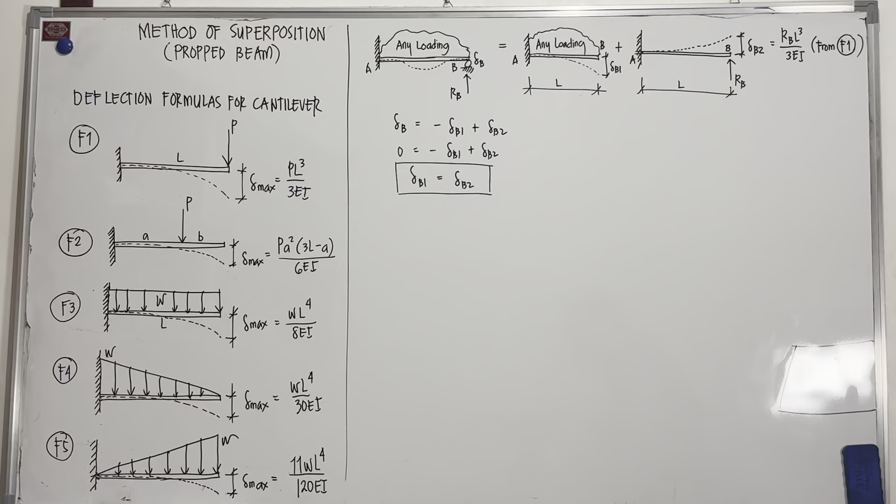So our topic for today is about the method of superposition in propped beam. So here are the deflection formulas for cantilever. Meron po tayong formula 1, 2, 3, 4, and 5, depende po sa load na nakalagay dun sa cantilever. So yung mga formula na yan ay magagamit natin pagka magko-compute tayo ng mga reactions sa ating propped beam. Kaya mahalaga po itong mga formula na nandito.

So here is the concept of the method of superposition. For example, we have here a propped beam with any loading, kahit anong load po yung meron dyan. Then this is point A and this is point B. Tapos ang gagawin natin, tatanggalin muna natin yung roller support. So pag tinanggal natin yung roller support dyan, magiging cantilever po siya.

So after nyan, pwede naman po nating ibalik yung roller support pero matatanggal na po yung mga loads niya. Ito po yung sinasabi dun sa superposition, that a propped beam can be computed by equal doon sa cantilever beam na any loading na wala siyang roller doon. Tapos ipa-plus lang po natin doon sa cantilever beam rin po pero roller support naman po yung kanyang support doon sa right end. Okay? So pagka in-add nyo yan, equal lang rin yan dito sa propped beam. Okay? So itong dalawang to na cantilever equal po siya doon sa tinatawag nating propped beam.

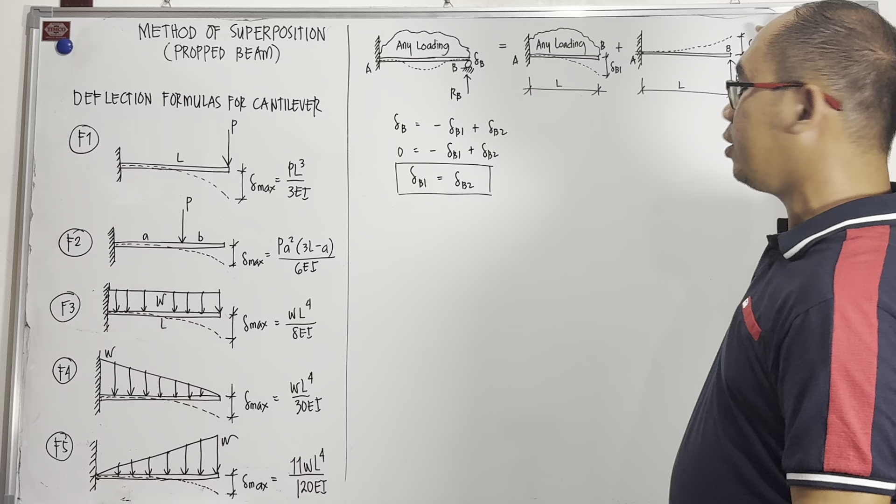So if we draw the elastic curve, let's say ito po yung magiging elastic curve niyan. Tapos yung elastic curve naman po ng cantilever beam ay ito. So downward siya kasi may load siya dito. Then kung yung reaction naman po sa point B ay magre-react pataas, so upward naman po yung deflection niya. So magkaroon po tayo ng sign convention na kapag downward po siya, negative, tapos pagka upward siya ay positive. Ibig sabihin, dito meron tayong deflection dito which is 0 ang value. Bakit 0 ang value? Kasi may support.

So deflection sa B is equal to negative deflection sa B1. Let's say this is B1, deflection sa B1. So negative yung value dito kasi downward. Tapos yung dito naman po, deflection sa B2 is upward, kaya positive po siya. Okay? So from this, we can say that deflection sa B is 0 kasi meron siyang support.

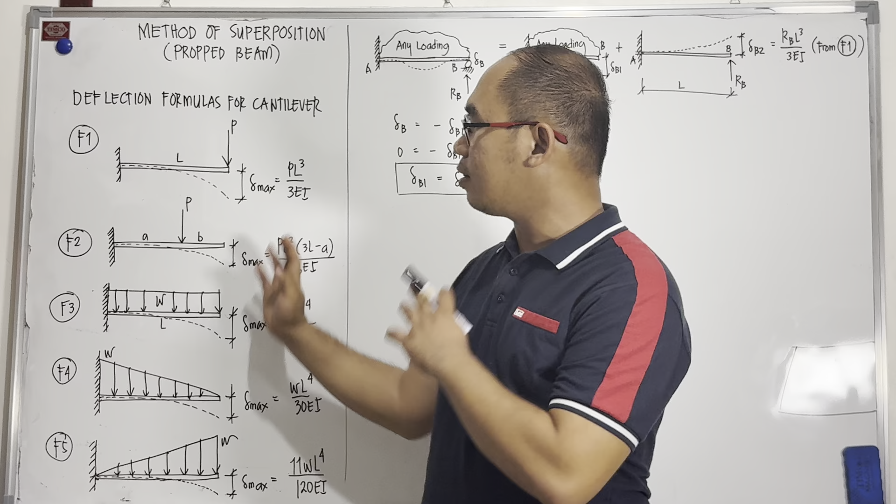Tapos negative deflection sa B1 plus deflection sa B2 is equal to 0. Okay, so take note that the deflection at B2 is always RBL cube over 3EI. Saan galing yung RBL cube over 3EI? From formula 1. So sabi natin dito ang maximum deflection, lahat po yan maximum deflection yung makokompute yan kasi sa free end. Lahat ng deflection sa free end ng cantilever beam is maximum deflection. So ang formula po natin is PL cube over 3EI. Ang P po natin dito is RB o yung reaction sa B. So palitan lang po natin yung P ng RB. So yun na po yung magiging value ng deflection sa B2.

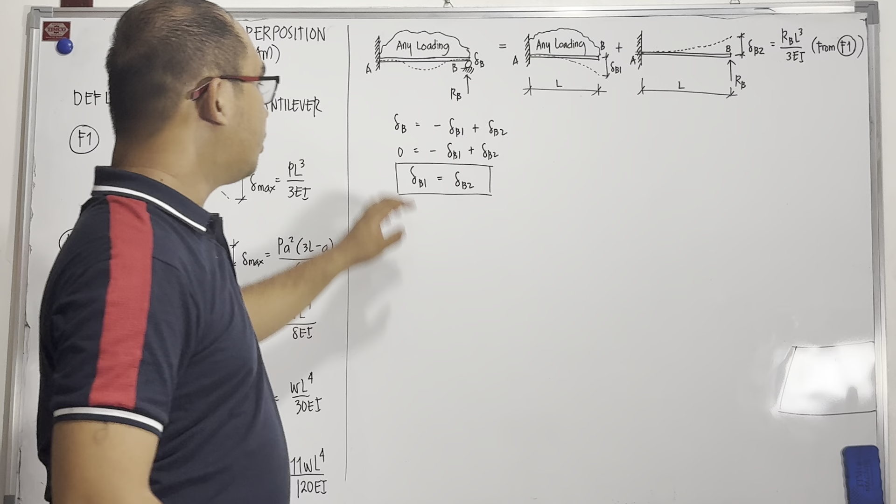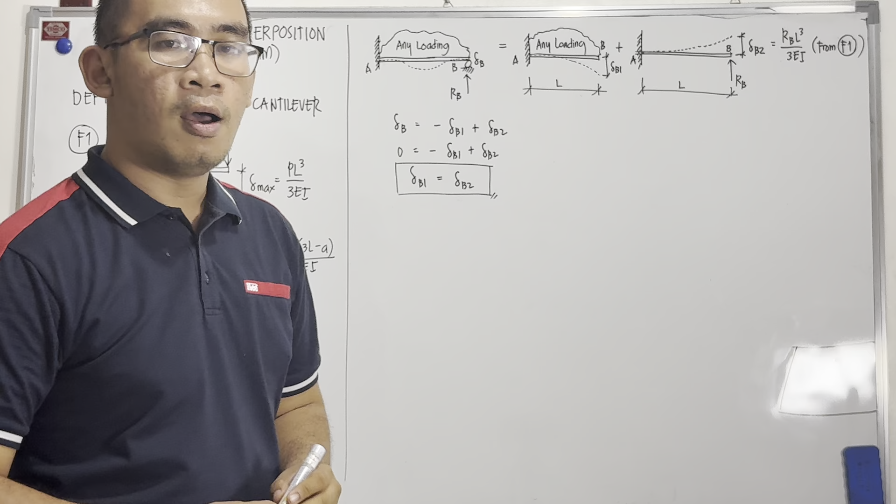Okay, so if we simplify this equation, we can say that deflection sa B1 is equal to deflection sa B2. So ito po yung gagamitin nating equation para makakompute mamaya ng mga reactions sa propped beam.

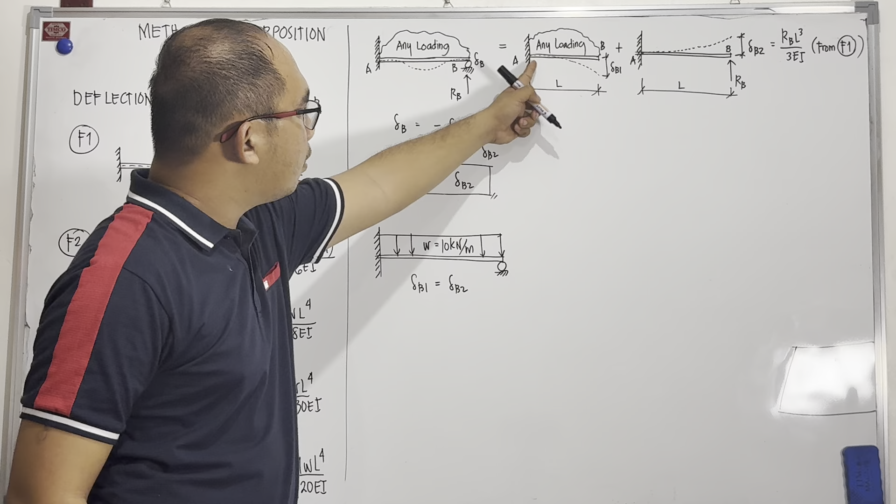So let's try an example. For example, we have here a uniformly distributed load, which is W is equal to 10 kN per meter. Tapos meron naman po tayong roller support. Okay? So paano po natin mako-compute yung reactions using the method of superposition? So deflection sa B1 is equal to deflection sa B2. Ano po yung deflection sa B1? Yun po ay ina-assume nating cantilever na meron siyang load.

So pagka meron siyang cantilever beam na meron pong load, alin po dito sa formula na yon ang gagamitin natin? Formula number 3, ito po yun, no? So kung tanggalin nyo po ito, ano magiging itsura? Magiging cantilever na may uniform load. So ang deflection po dito ay yung ating WL to the 4th over 8EI.

Equals, what is the deflection sa B2? That is RBL cube over 3EI. So if we simplify that, matatanggal po yung raised to 4, matatanggal naman yung raised to 3, so that the reaction sa B is equal to, magka-cancel po yung EI.

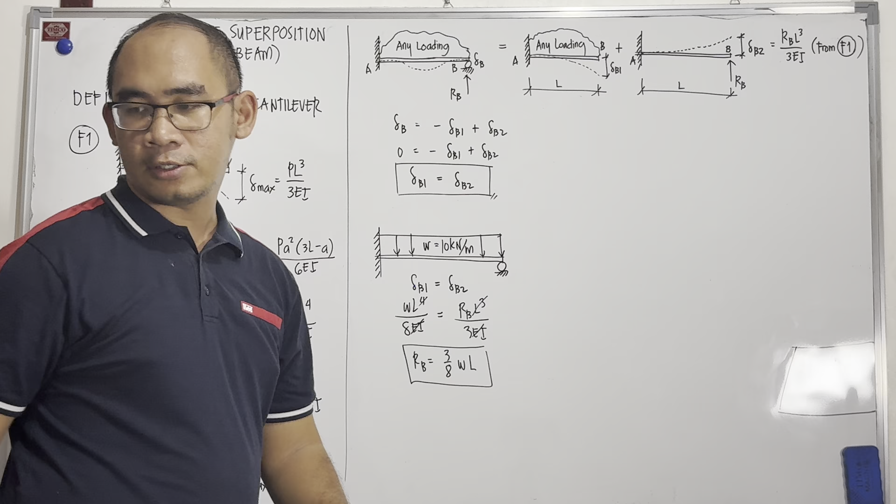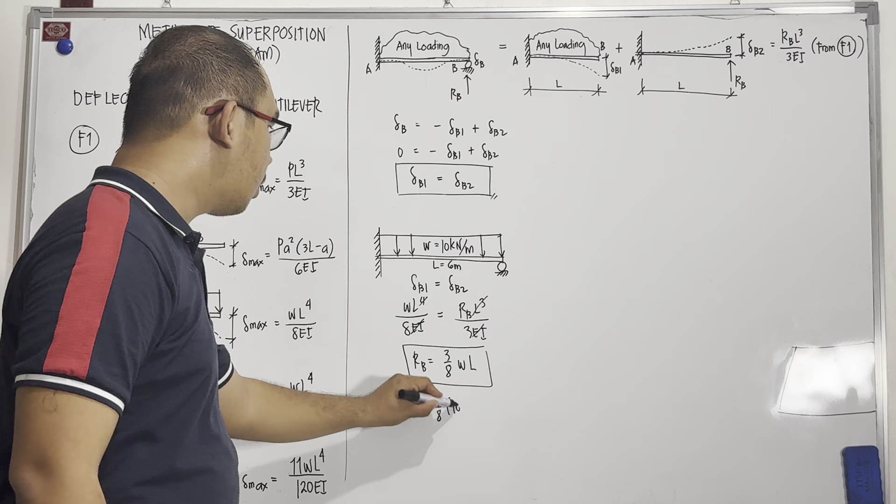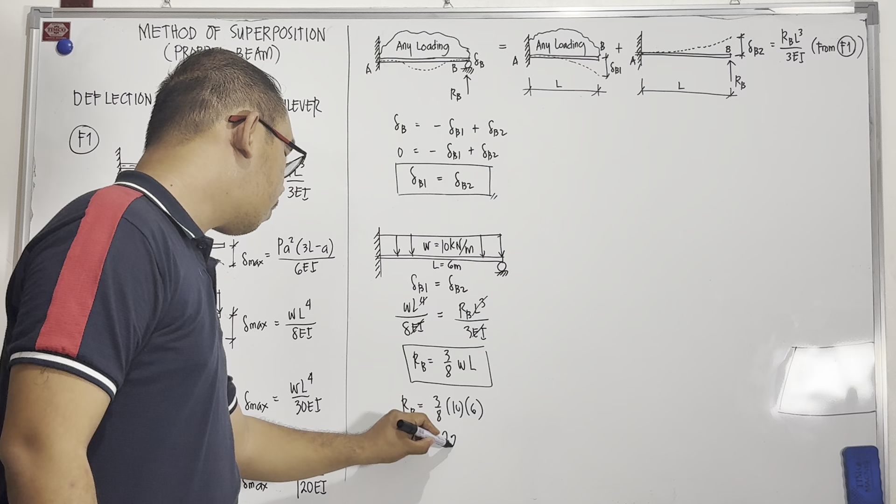So that is 3 over 8 ng WL. So here is the formula for the reaction sa B kapag uniformly distributed load. Kung gusto niyo, gamitin natin yung value na meron tong length na 6 meters, tapos may uniform load siya na 10 kN per meter. So let's say yan yung value. So you can simply compute for the reaction sa B by 3 over 8 ng 10 times 6. So the reaction at B for this problem, that is 22.5 kilonewton. So ito po yung formula.

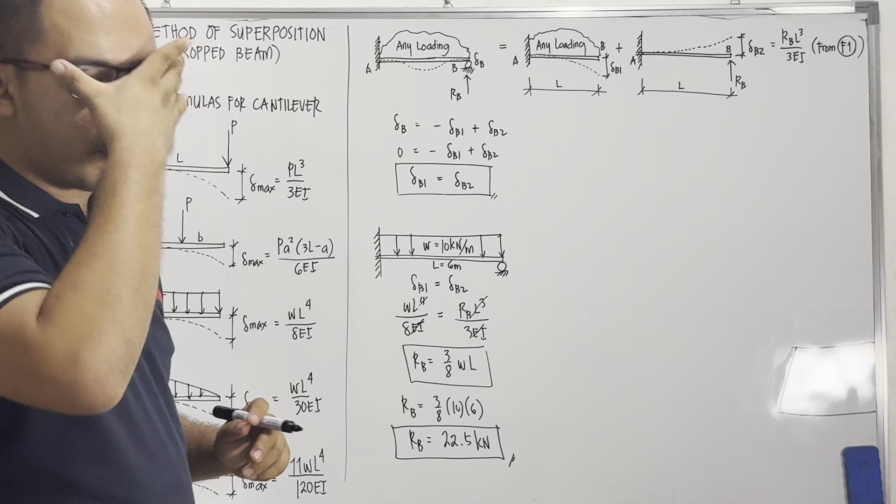Pwede nyo na pong kabisaduhin kung sakaling maka-encounter kayo ng ganitong problem, na dapat distributed load siya hanggang doon sa lahat ng span.

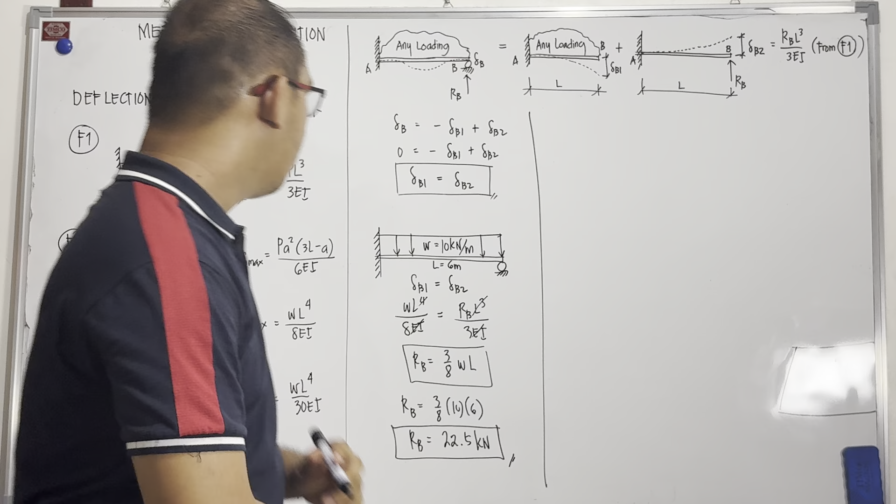Okay, let's say meron naman po tayong triangular load. At ang triangular load natin ay ganito. So let's say meron tayong triangular load na 30 kN per meter, tapos ito ay 6 meter. So ito po yung W niya, tapos ito naman po yung L. Okay, tapos may point A, tapos may point B rin po tayo. So kung tinitignan natin ang reactions, balik lang po tayo sa formula natin.

So deflection sa B1 equals sa deflection sa B2. Ano ngayon ang deflection sa B1? Anong formula po dito ang magagamit natin? That is formula number 3, so that is WL to the 4th over 8EI, is equal to, ano po yung deflection sa B2? Ayun po, so RB L cubed over 3EI.

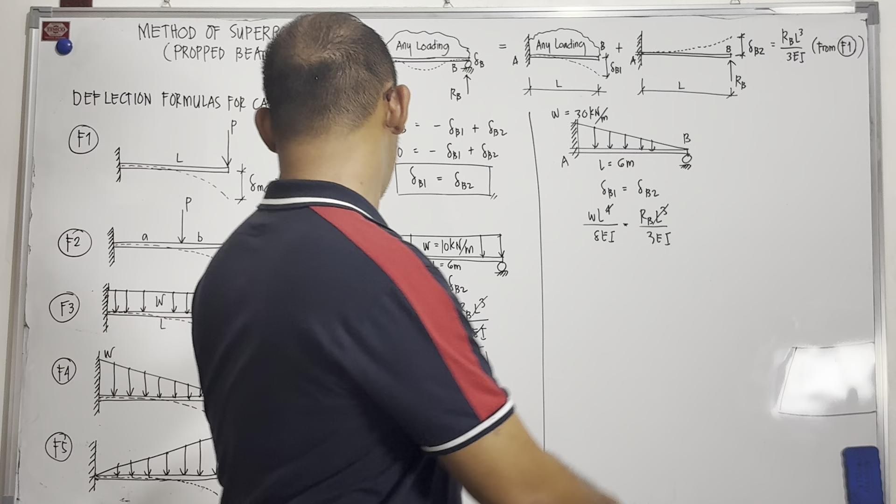Okay, so the reaction at B, magka-cancel lang po ito, tapos yung EI - mali pala yung ano dito, it is over 30 dapat. Sorry, so this is over 30 EI. So magka-cancel po yung EI. Tapos ang magiging formula ng RB natin ay 3 over 30 ng WL. So pwede po nating ma-simplify yung 3 over 30. RB can be 1 over 10 po ng WL.

So you can memorize this formula. Basta yung ating zero point or zero intensity ay nandun sa roller support, tapos nandun sa fix yung highest intensity. So that is 1 over 10 ng WL. So if that is 30, tapos yung ating length ay 6, so that is 1/10 ng 30 multiplied by 6. So that is the RB. Therefore by computing the value of RB, that is 18 kN.

So ito po yung sagot. Kung gusto niyo nakabisado din itong formula, mas maganda, no? So paano naman kung trapezoidal load siya? Pagka trapezoidal load naman po siya, let's say ito po yung trapezoid natin. So meron tayong trapezoidal load. Gawin na lang natin parang combination nung na-compute nating rectangular at saka yung ating triangular load.

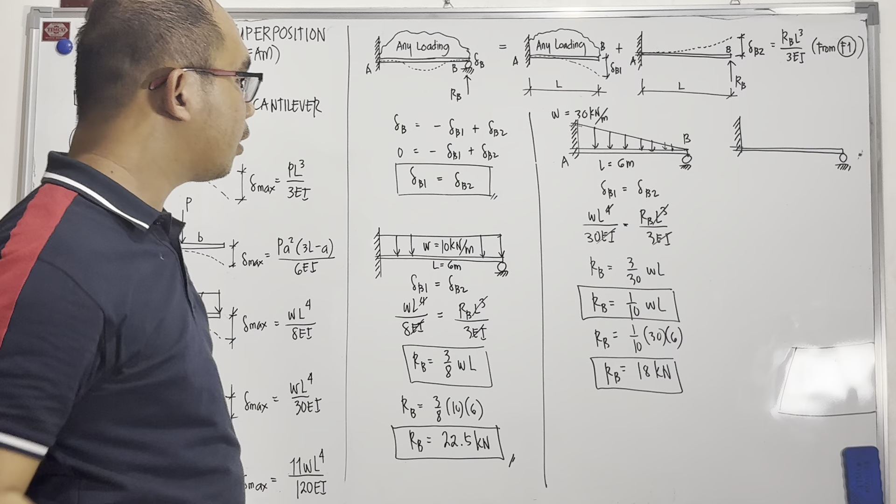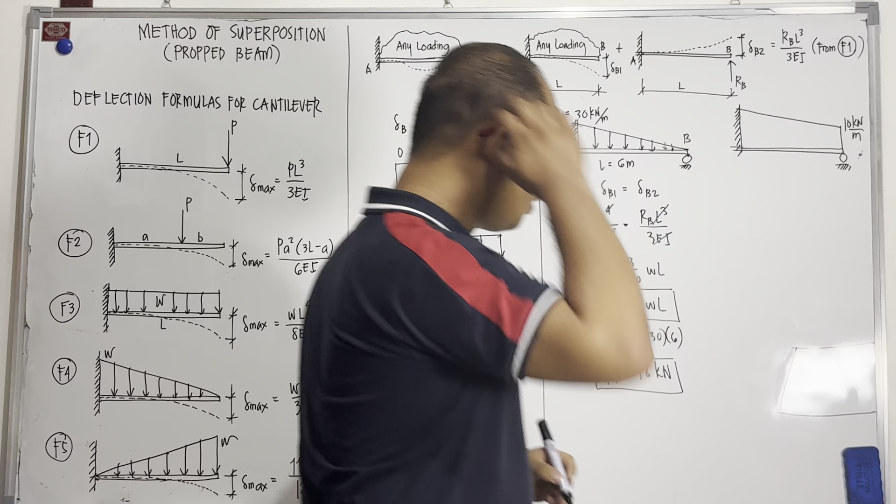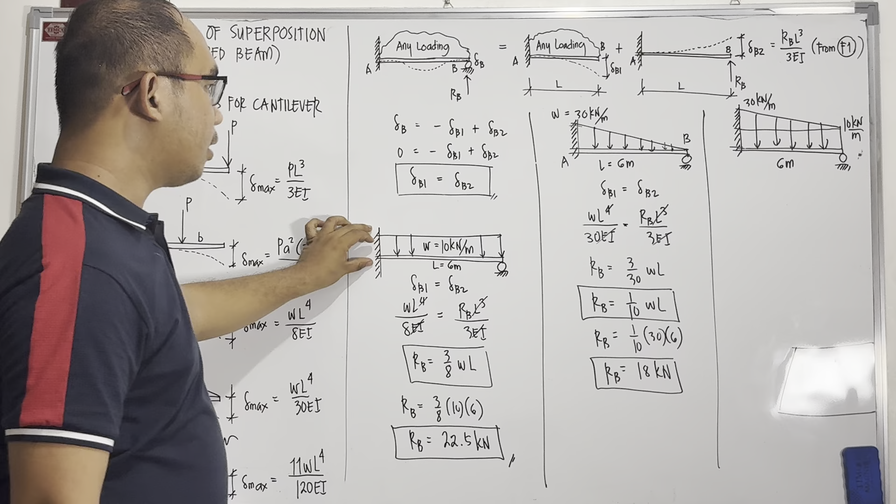So magiging ganito po siya. So ito ay 10 kN per meter, let's say 10 kN per meter yan. Tapos yung isa naman po ay 30 kN per meter. Same distance, ang length niya po ay 6 meters. So, how to compute for the reactions at B? Kung mapapansin nyo, pwede natin itong hatiin sa dalawa. Magiging triangular load, magiging uniform load siya na 10 kN per meter plus yung ating triangular load na 30 kN per meter. Therefore, pwede na po nating makompute ang reaction sa B by just simply adding these two.

Okay, so that is 3/8 ng, let's say this is W2 and this is W1, yung mas mataas ang intensity, that is W1. So how to compute for the reaction sa B? That is 3/8 ng W2 times L plus 1/10 naman po ng, so ang 1/10 ng W dito, ito lang po yung height na to. Paano natin makompute yung height na yan? 1/10 ng W1 minus W2 multiplied by the length L.

So to compute for that, RB is equal to - okay, so yan na yung formula natin. Kung gusto nyong i-memorize yung formula na yan, okay lang po. Yan ay applicable kapag 0 ang intensity, tapos highest intensity nandun sa fixed support. Iba rin po yan pagka nandito ang 0 intensity or increasing papunta siya dun sa highest intensity nandun sa roller. Ito naman yung gagamitin nyo kung sakaling mangyari yun. Okay, so ang gagawin natin dito, ilan ba yung 3/8 ng W2? So that is 22.5.

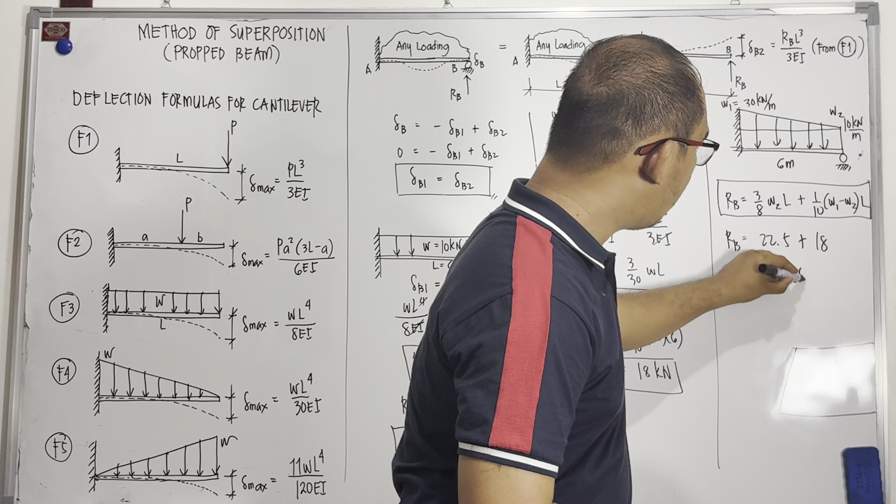I-plus na lang natin yung 18. So pagka kinompute natin yan, so 22.5 plus 18 is 40.5. Yun po ay 40.5 kN. Ito na po yung sagot.

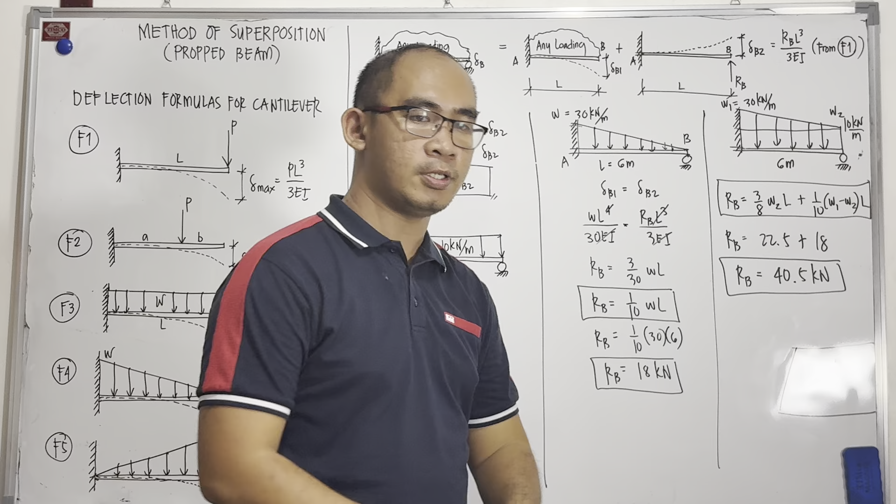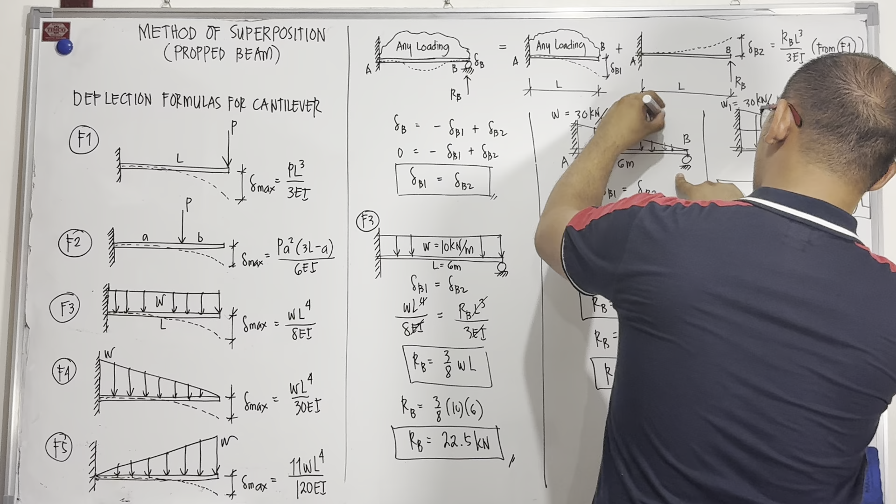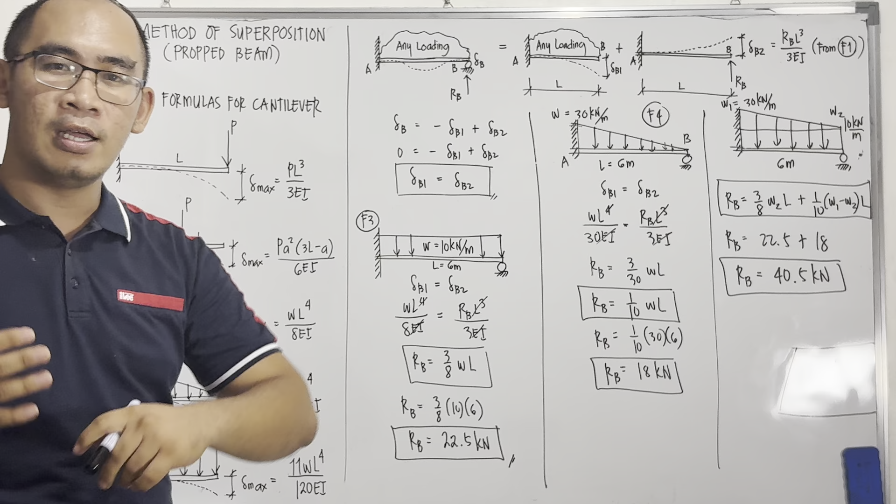Okay, so yan yung solution ng ating method of superposition. Kung gusto nyo na merong ibang way ng pag-solve, paano kung hindi ko kabisado yung formula na yan? Dito kasi kailangan kabisado mo yung formula number 3, at dito naman dapat kabisado mo yung formula number 4. So medyo matrabaho kung ganyan, medyo maraming formula dapat kabisado nyo. Isa yan sa disadvantage ng ating method of superposition, dapat kabisado natin yung formula. Meron namang ibang methods, pero pwedeng iisang formula na lang ang kabisaduhin nyo.

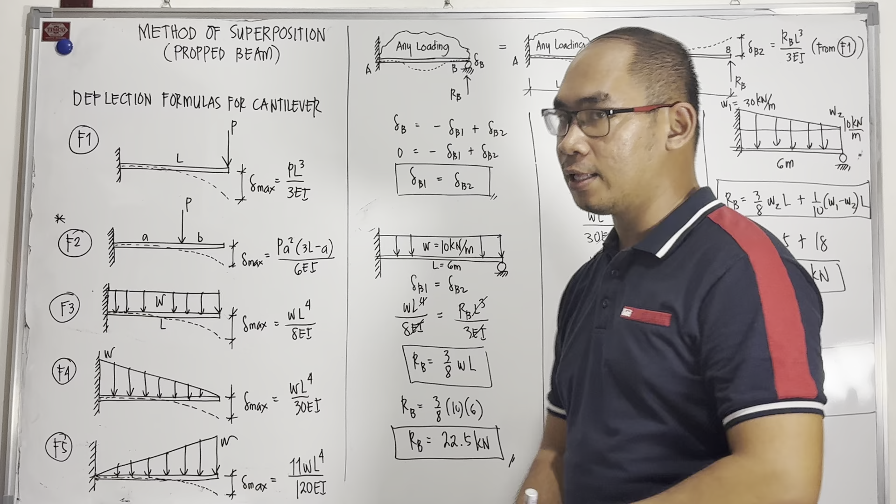Kung isang formula lang ang kakabisaduhin nyo, kailangan kabisado nyo si formula 2, then gamit kayo ng integral calculus. Paano po yun? Ang gagawin nyo kung gagamit kayo ng integral calculus, let's say meron tayong uniform load. Ito po ang mangyayari.

Meron po tayo ditong Y, tapos let's say this is DP. Ang DP natin is the area ng ating strip, so ang height ng strip natin ay Y, tapos ang thickness po niyan ay dx. Kung dx ang length niyan, so ang magiging formula po natin dito ay deflection B1 is equal to deflection B2.

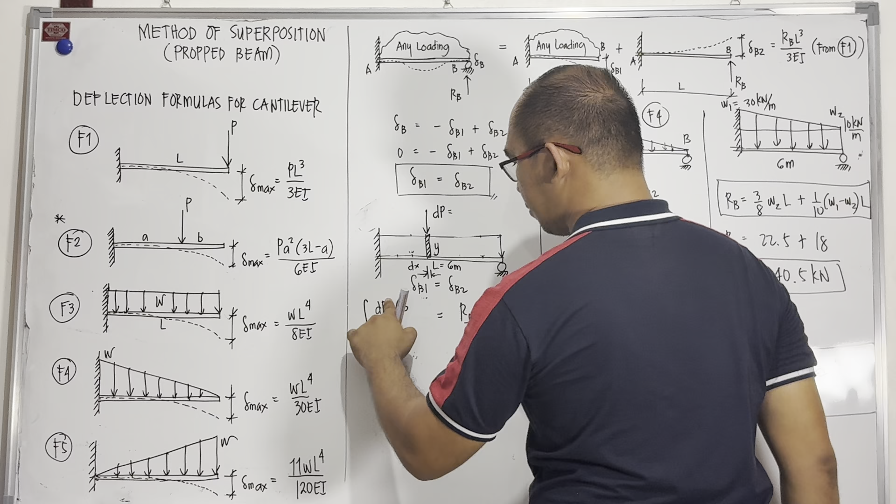Hindi naman mababago yun sa deflection ng B2, ang mapapalitan lang po ay dito ay yung sa left. Okay, so ang magiging formula na dito ay dp times A times 3L minus A over 6EI, tapos yung limit po natin is from 0 to L.

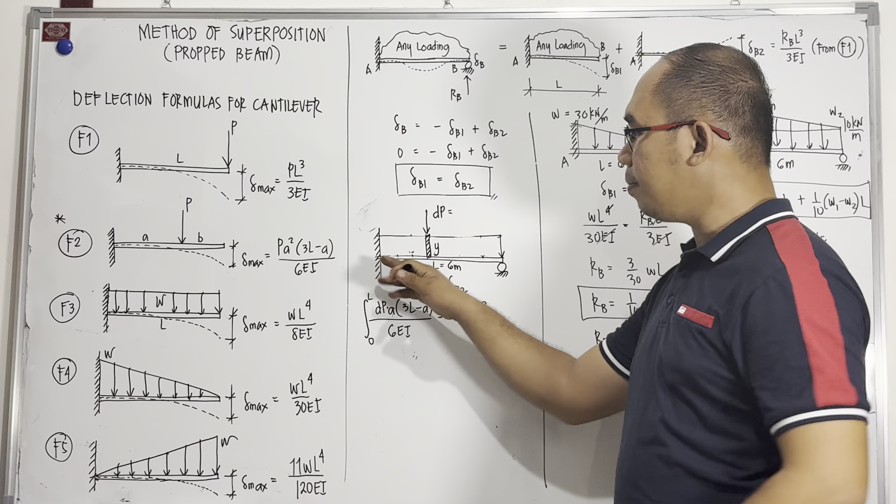Maglalakad yung limit natin from 0 hanggang makarating dun sa length distance. So what is dp? Dp is the value of our y. Tapos yung A natin, that is the distance. Let's say maglalagay tayo ng x-axis at saka y-axis. Ito po ngayon yung distance x, distance A - sorry, at yung distance A na yan ay x distance po.

Okay, so let's try to compute. Magiging integral of dp is y. But saan equal yung y? Equal yung y sa ating w, which is equal din po sa 10 kN per meter. So gawin na natin 10 dx, magiging 10 dx to, y dx to, so this is 10 dx.

So 10 multiply by - dito na natin ilagay yung dx - by a. What is a? That is distance x, times 3, times length is 6, times 3, 18, minus x, all over 6EI. Then the limit is from 0 to 6, is equal to RB L cube over 3EI.

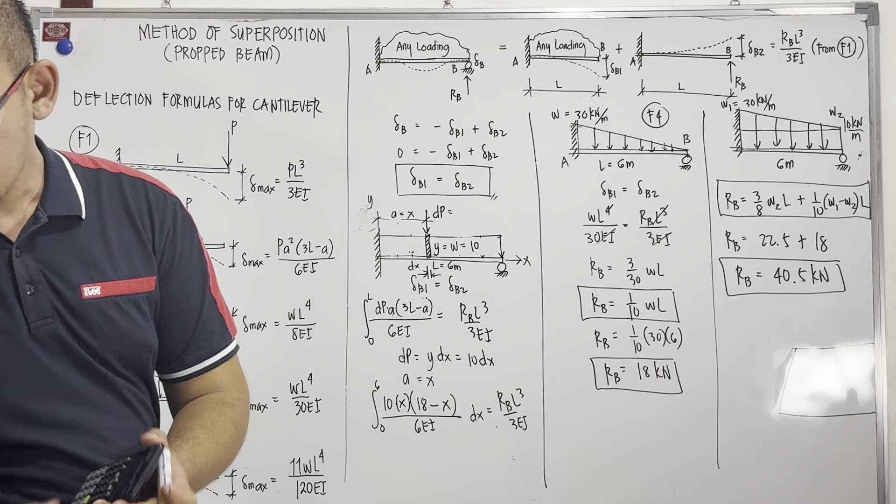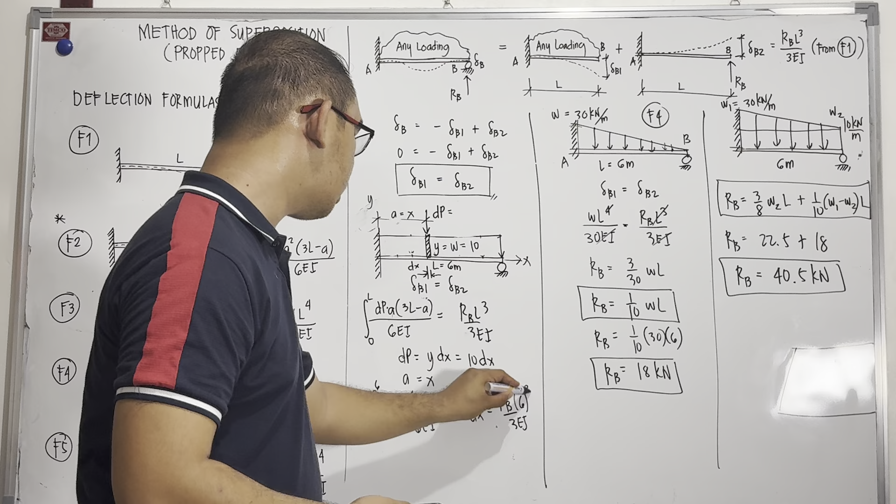Okay, so you try to compute yung ating left support. So ilan po yung magiging value dito? So 10x times 18 minus x over 6, from 0 to 6. 420 - so ito yung ating 3. Ang length natin ay 6, palitan na natin ng 6 cube, so times 420 over EI is equal to 6 cube over 3.

Okay, so ilan po yung value dito? Check ko lang po sa computation. So ito ay P. Check lang natin, ha. (18 minus x over 6 from 0 to 6). So times 3 over 6 cube.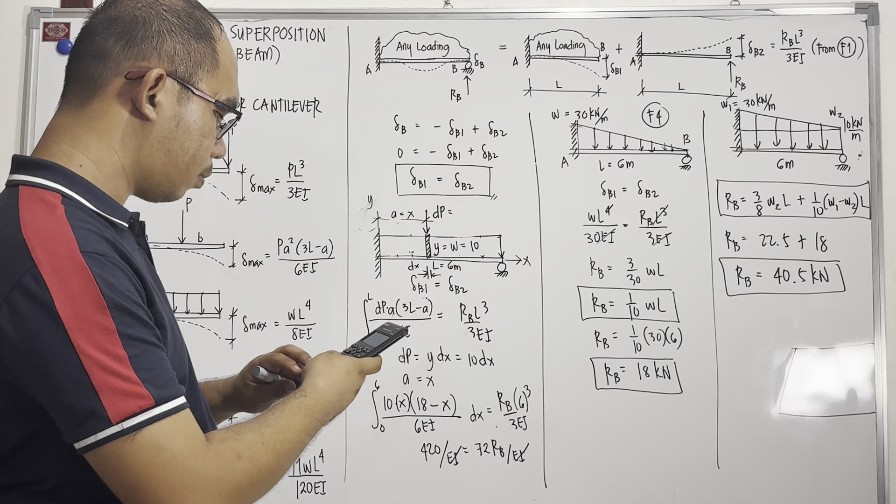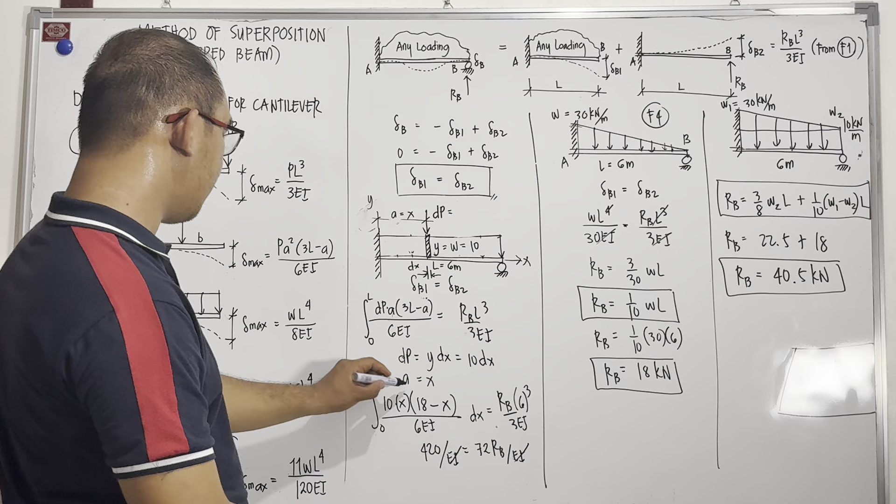Okay, so ang ating RB - sorry, may squared pala to. Kaya pala hindi lumabas yung sagot. So that is integral of 10x squared times 18 minus x over 6, from 0 to 6. Ayan, so 1620. So 1620 over EI divide sa 72, that is 22.5. So RB is 22.5 kilonewton. Same po ng nakuhang value kanina.

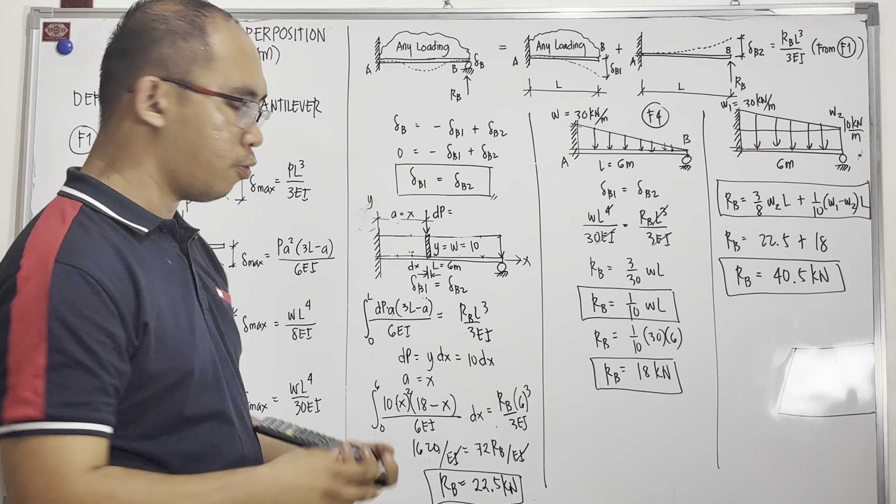Kung maalala nyo yung nakasulat dito kanina, so dito naman po, pagdating sa ating triangular load, ang gagawin naman po natin ay integral na rin po ito. Kung hindi nyo kabisado yung formula, dapat kabisado nyo man lang itong formula 2. So dito formula 2 ang ginamit natin, so dito formula 2 rin po ang gagamitin natin.

So the formula here is dP times a squared times 3L minus a over 6EI, with limits from 0 to L. So our dP here is still y dx.

But where is y equal to? If we place x and y axis here, this is x, this is y. By ratio and proportion, this is distance x, and if this is distance x, this is distance L minus x. So y over L minus x equals 30 over L.

Let's substitute L with 6. So our y here is 30 over 6, which is 5, times 6 minus X. Therefore, our dP equals 5 times 6 minus X dx.

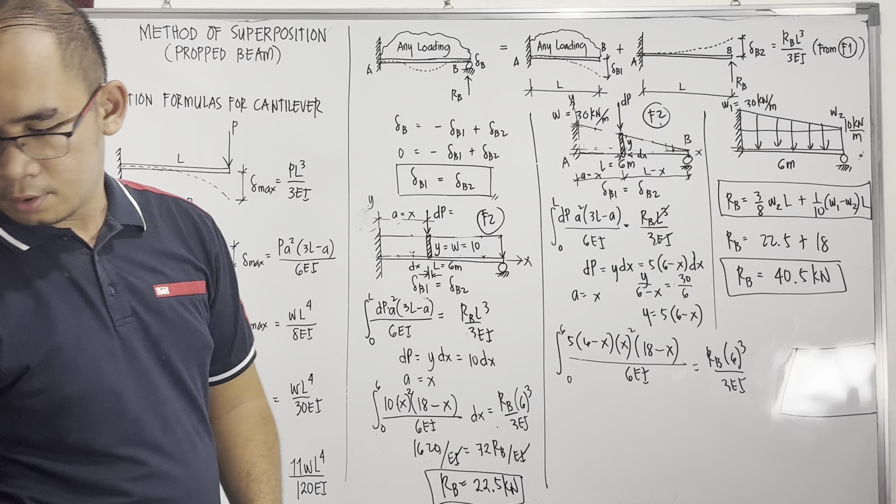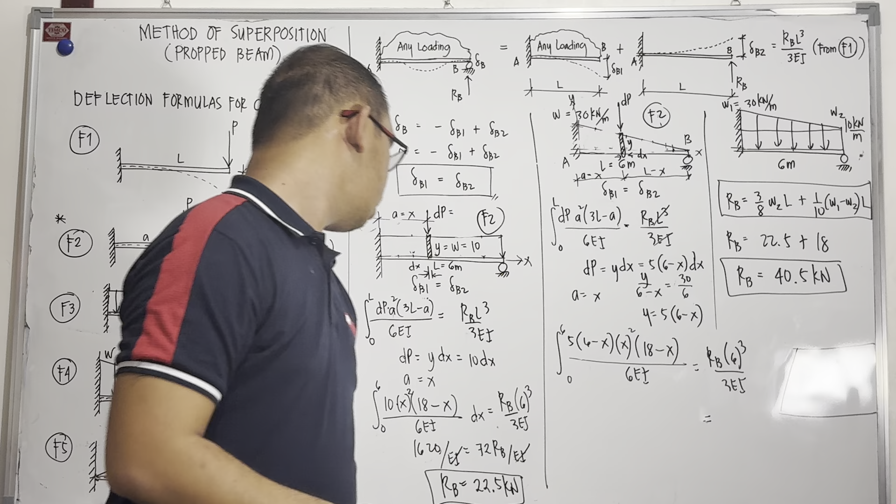So let us compute for our values here. So this 6 cubed over 3 is 72 RB. The EI cancels out.

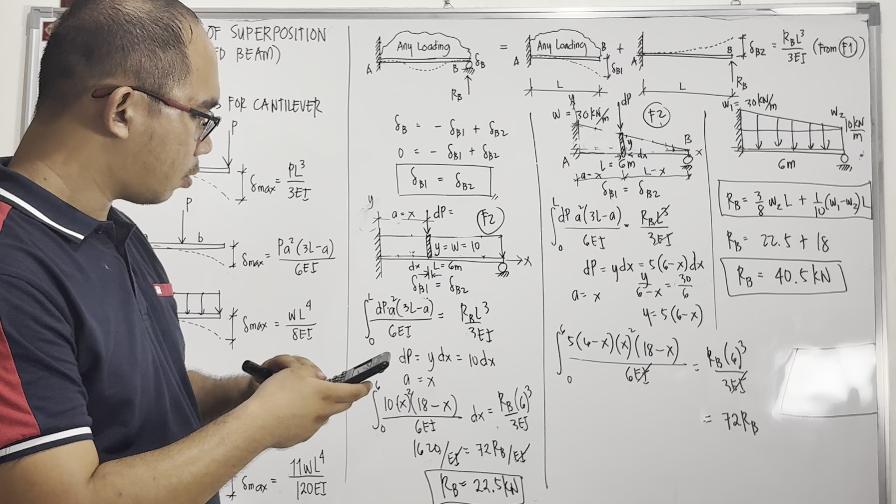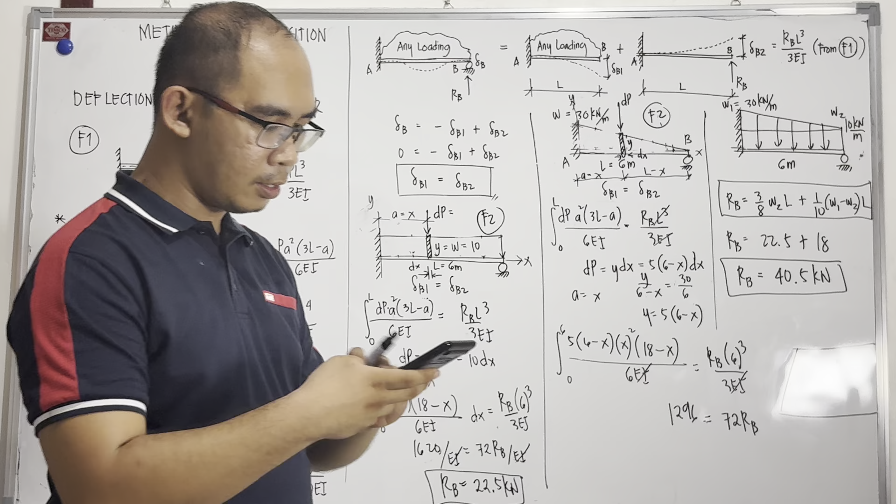So the integral of 5 times 6 minus X, times X squared, times 18 minus X, over 6, from 0 to 6. When we compute that, we get 1296 over 72. So the reaction is 18 kilonewtons.

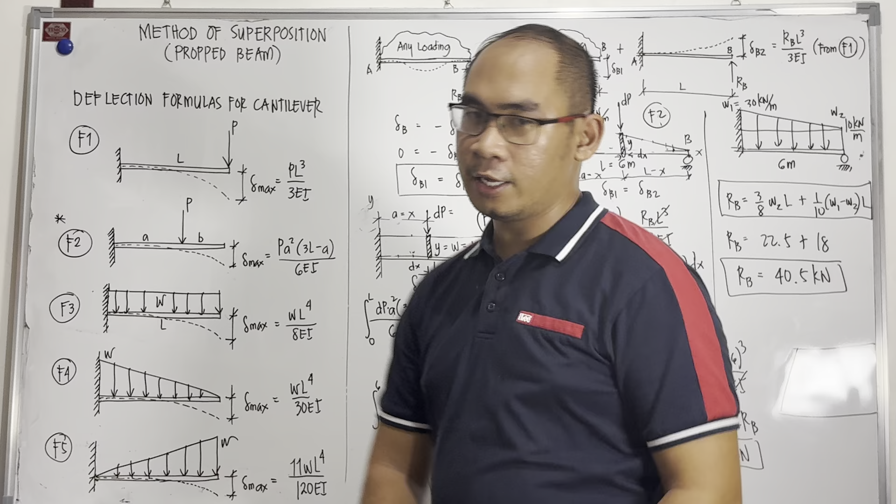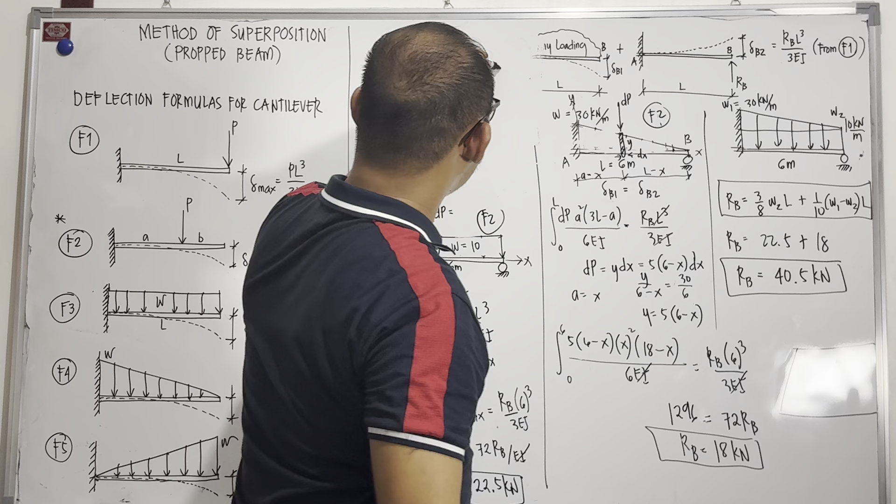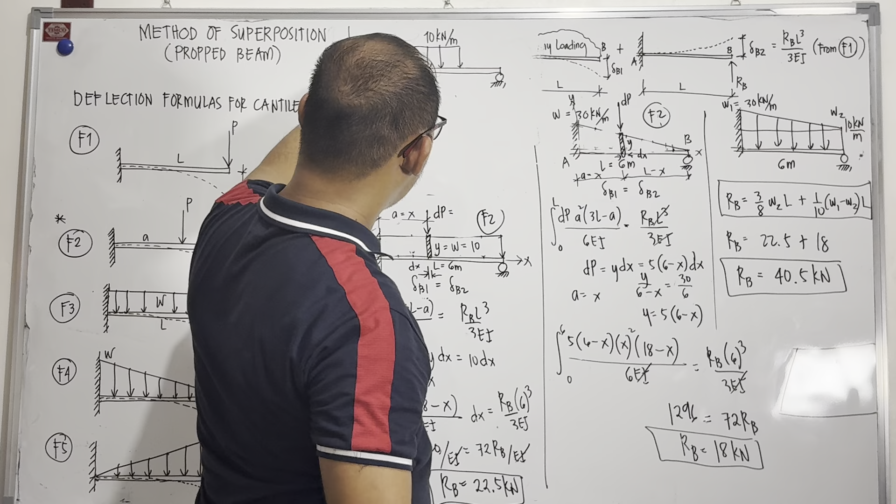Let's say we have a fixed support here, with a uniform load in the middle at 10 kN per meter, then 1 meter, 2 meters, then 2 meters. You simply compute that by the integral of dP. So our dP: dP A squared times 3L minus A over 6EI equals RB times L cubed over 3EI. What is the value of dP?

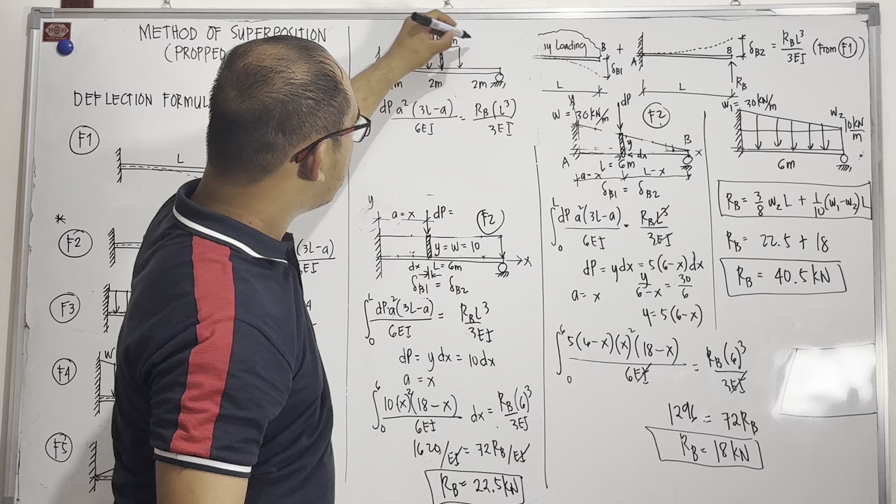Our dP is y dx. Our y equals 10, so just 10 times dx here. Where does A equal to? A equals X. Since that's squared, we square it, then times 3 times length - length is 5, times 3 is 15, minus distance A, which is X, over 6EI.

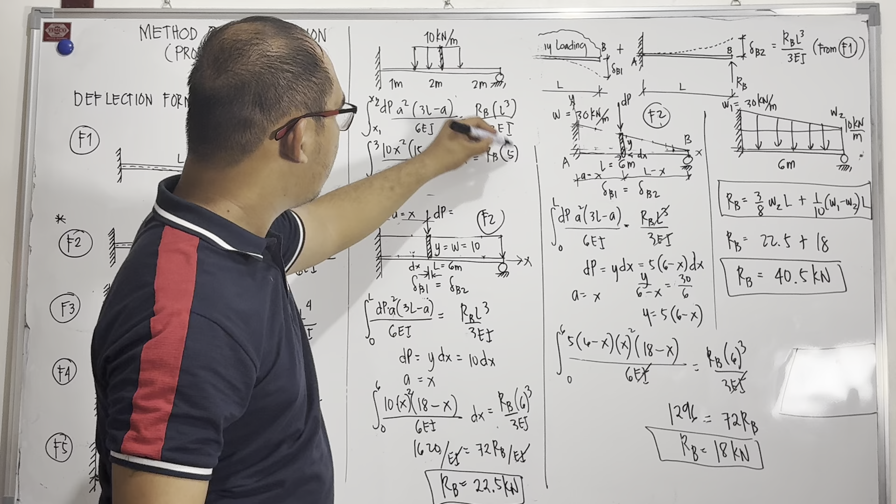Then from, what's the limit? This is from x1 to x2. Where did our uniform load start? From x1 at 1 up to 3. That's it. This equals RB times, the length is 5, cubed over 3EI.